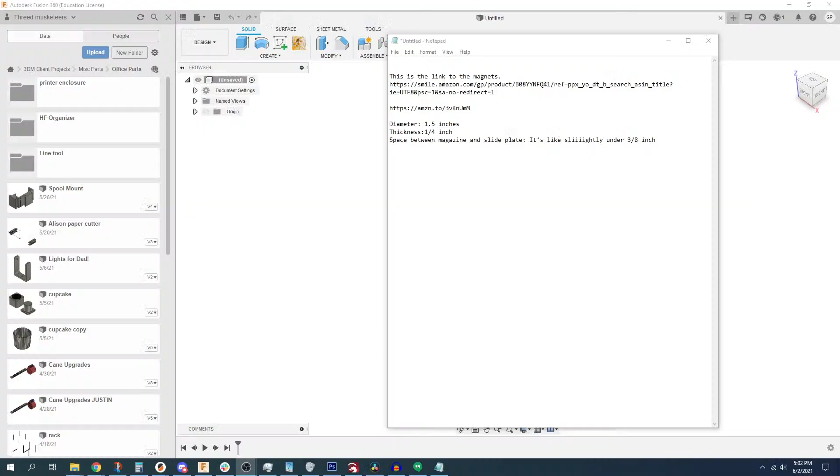Alright, we got Little Grant up now. We are taking a look at some of our design constraints. This product is - and I'm going to try to spell this out to you without showing you, because showing you is a little bit weird - for someone that does 3-gun. 3-gun is 3 different types of guns in a competition, just deal with it, it's an American thing, Allison, alright? I know you're going to ask me about it. It's an American thing, don't worry about it. But when you start the competition, all firearms must be unloaded, particularly the pistol. However, that magazine that goes into the pistol first does need to be in a holster.

And it is tradition that a lot of the shooters put them on magnetic holsters. However, the magnetic holsters have a few weird problems. One, the dude that makes them kind of sucks - very expensive, and from what I could tell, didn't know what he was doing on Etsy. So Kenzie made her own that is literally just some magnets. I'm going to post the link to the magnets in the chat that she is using so you guys can get an idea. She's got 2 of these magnets stacked vertically like this that she can then place her magazine onto, because these are all about speed.

So literally, when she is going to reload, she's letting the magazine fall out of the gun, grabbing another one and reloading it. And the next person that goes around, they pick them up, right? So she is slapping other people's magazines onto this holster. But the problem is, you get metal shavings that stick to it, and it's a real pain in the ass. I have this same problem with these flashlights.

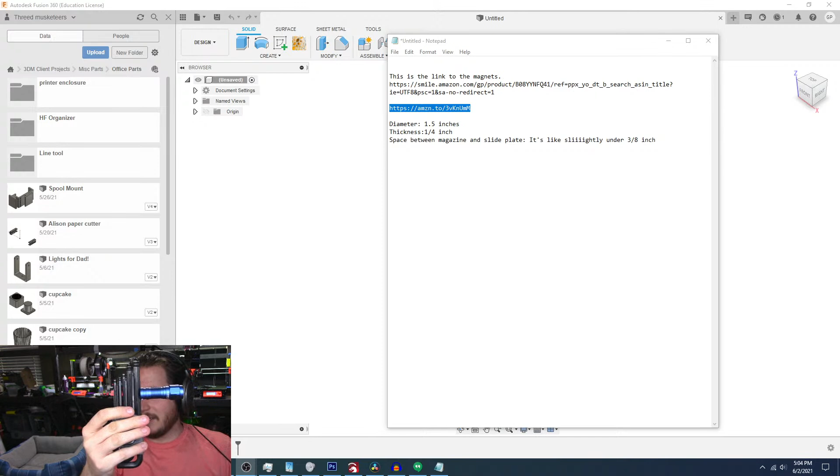Did Grant bring a piece of steel? Maybe. Is this steel? No, that's aluminum. Is this steel? Ha! Steel! See? The magnet has a - damn it. The light has a magnetic tail cap to it, which is great if you need to stick it on something and shine light down so you can have spooky... Well, that doesn't work. Here, I'll put it on the table here. So you can have really spooky talks about spooky things. God, this isn't... There. Spooky talks doing spooky things.

Anyways, we are going to design some covers. That way, if she gets any metal shavings or debris on them, you can pull the covers off. And because the magnets are powerful, but not that powerful, the parts will just fall off of them.

We're totally fine. She actually sent me some design specifications. The diameter is 1.5 inches. The thickness is 1/4 inch. And the space between the magazine and the slide plate - the slide plate is what she uses to take this thing on and off, it's all quick release, basically awesome American magic, that's the easiest way to describe this stuff - is slightly under 3/8 of an inch.

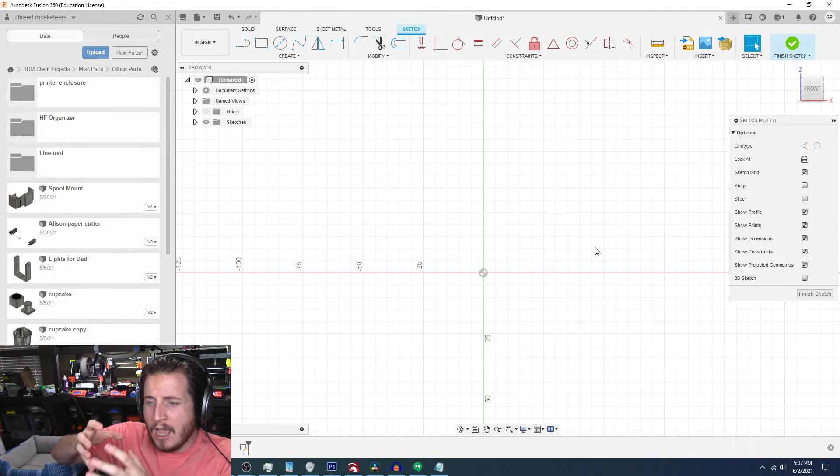Because remember, when you pull the magazine off, it's not going to take the plastic part with it, right? The plastic part is non-ferrous, so we shouldn't have a problem there. But let's go ahead and start and get our base dimension set out here. So we know it needs to be about 3/8 of an inch out.

Yes, I agree, Justin, TPU might be a good print. Then we can add our relief cuts. My only concern is that sometimes TPU doesn't go back to exactly the same place that it was, so it'd have to be a little bit thicker than normal.

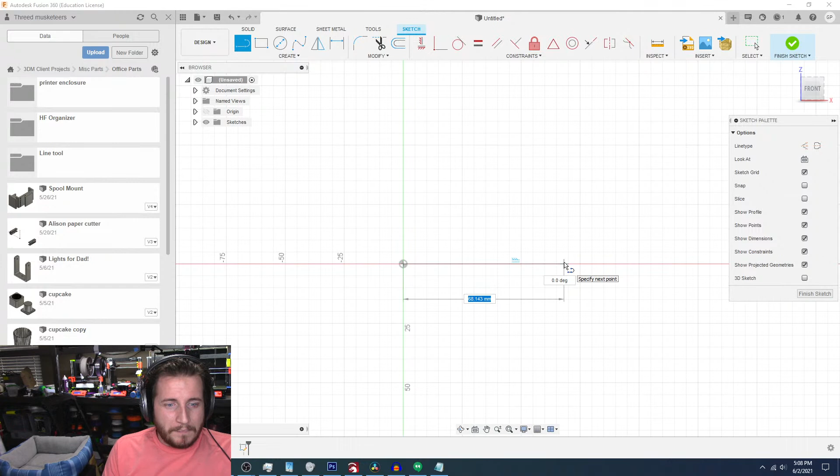And you sent me your logo, which I should pull up because I want to make sure we can put that in there. So let me bring up my email so I can grab that, give me just a second. I was hoping I was going to get an Illustrator file, but unfortunately I didn't. My whole plan was to embed your logo into it, but we're going to cheat, and potentially do it the hard way.

Kenzie, do you want the reticle, or do you want the fire-breathing dragon thing? Let me know. All right, let's hit it.

All right, so we know we need to make - no, Fusion, don't do this to me - we need to make this dimension 1/2 of 3/8 of an inch. Oh, hang tight. Oh, cool. All right, preferably DXF - if you have it in DXF, that's what I really, really want, because DXF I can put right in here and it makes my life really easy. So 3/8 of an inch should be 0.375, but I'm just going to do it the hard way.

So 3 divided by 8, times 1 inch.

We're going to do all of this divided by 2. This thing's real tiny. Don't do that, we're starting with... where's the thing? Diameter is 1.5 inches, so it's 0.75 inches. We have to get our diameter set, because the diameter is what constrains everything else.

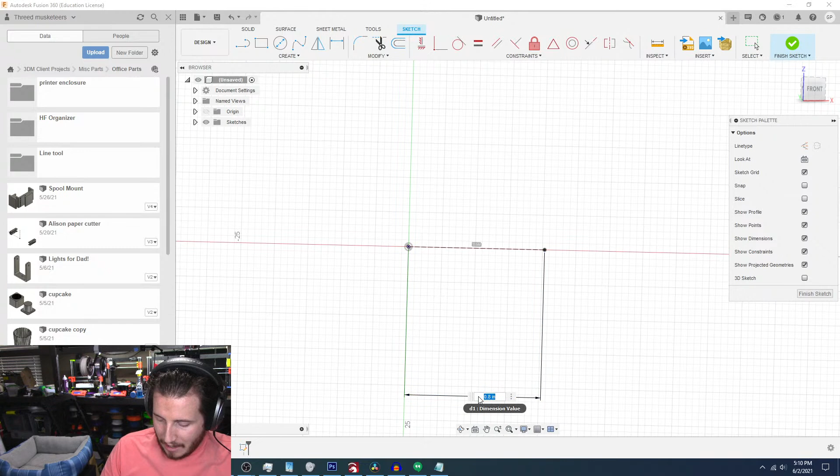So we know that we want to make this a little bit big, so we're going to do it deliberately. We're going to go here from 0.75 to 0.8. 0.8 takes us to 20, so I'm just going to go straight to 20 millimeters. That should give us really enough room for it to slide over. Because it was 19 and some change, now it's going to go up to 20, which should give us some space there.

When I get the logo, guys, I will get that over to you, but I'm waiting for Kenzie.

Anyways, let's get some of our design stuff rolling here. Alright, so we want to do... our thickness is 1/4 of an inch. We want it to look pretty for that, so we're gonna curve the outside edge. And really, we don't got to do anything all that difficult. It's gonna come up and back to the center. So we can grab the center post here, come up till we hit 90. And we can hit our dimension from here to here, 0.25 inches. That is literally the base of it.

Let me refresh my email to see if I got that stuff. Not yet. Kenzie, let me know when you send it, that way I can keep an eye out for it.

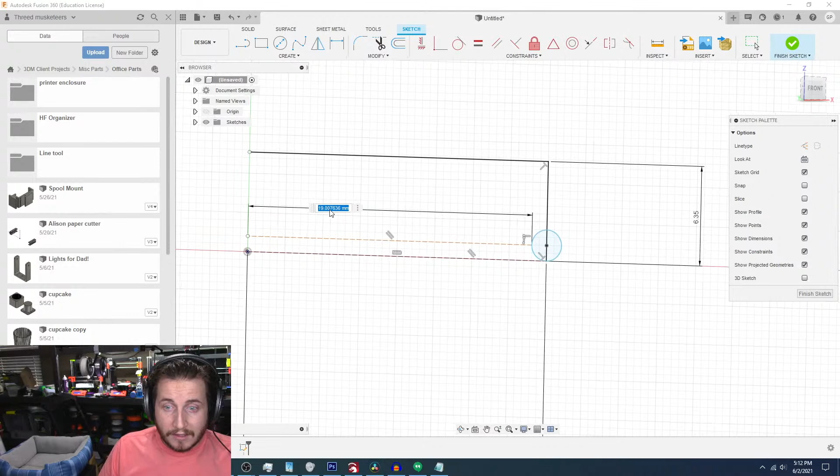We're going to go ahead and grab a circle, throw the circle here, bring it to there. Now we need to make a line coming from the end of the circle to the end here. We need to go back and hit X to make that a construction line. We need to put a dimension on this. We want this to be about 19 millimeters. Okay, and that will help us set all of this up.

Sent it as a link. Okay, let me grab my email and find it.

So what this is doing while I'm waiting for my email to reload, we are making sure that the detent we're creating is not too crazy. This will help us better identify what's going on. So I want to make sure that I create a point, match that there, and use my constraint, which is coincident, for this line to there, which it already is, and same thing for that. So now we can use our diameter tool, get a diameter, and that is more than adequate.

Just waiting for the emails to come in. Got it. Grabbing the logos now. And then I'm going to send them to my staff so that they can convert them into what I need. Give me just a second, everybody. Okay.

Kenzie, which one of these do I want? I'm seeing lots of these. I'm guessing it's the top one. Is that the style that you want, with the big bad boy? Alright, while we're waiting for that, let's keep going.

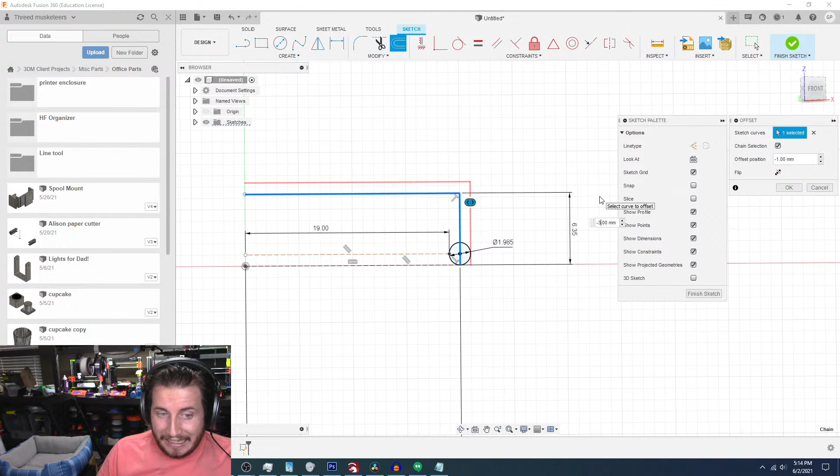We need to make sure that we have enough thickness, right? This thing needs to be thick enough that we don't have any issues. So to do that, we're going to hit O for offset. We're going to offset in the other direction, and I'm thinking because this thing is going to get the hell beaten out of it, we want to make sure that we're giving her at least 3 millimeters. This thing is going to be a bit of a chonky boy, but we need that.

Kenzie, can you measure the distance that you have between the two magnets themselves? How much distance you have there? Because I want to make sure that I don't make these too big that they don't fit.

So while we're doing that, I'm going to do a line from here to there, and we are not going to constrain either of these lines. L for line, of course. Yes, L for line, we're not going to constrain. Geez, let me do a line. X for construction. Just bring it all the way up so I can make sure that everything here is coincident.

Can make sure this is coincident with that, which it is. Okay, so the little line should be perpendicular to here, and then also perpendicular to here. Now, because we don't need to have a constraint on this, I mean we can if we want, we can just hit a dimension tool. It's going to over-constrain it. I'm guessing, why are you mad?

Well, doesn't matter, that's inconsequential for what we're doing. We could viably trim this as well. We're going to have to make this so there's a quarter inch space between them.

All right, so I'm going to give you 2.5 millimeters. Grant, redo that, it is negative 2.5. And that way you should have enough space in between them, because 6.35 millimeters is a quarter of an inch, so 2.5 will get us at 5. Gives you a little bit of wiggle room to make sure you can get these out. Quite frankly, I'm going to go down to -2 even.

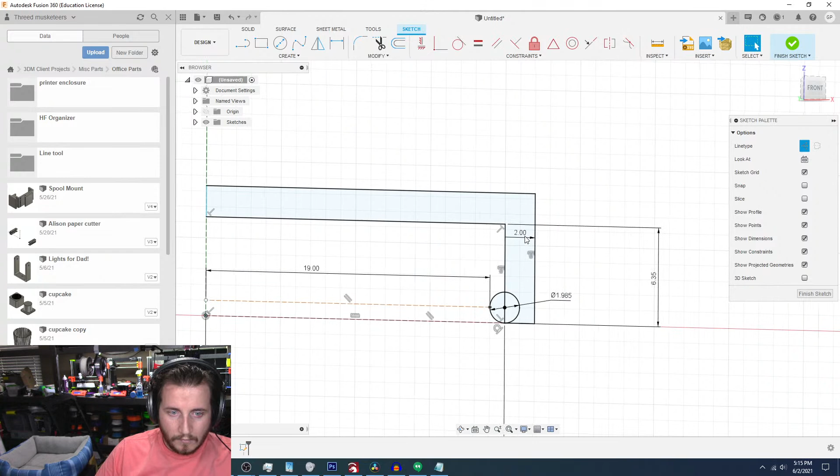Okay, and literally there's probably not much more we have to do. We're going to create a revolve. We're going to grab this, and this and this. We're going to revolve it around the center axis. That gives us our main part now, with this ball basically on the inside. We're going to create a new body out of it.

I'm going to do something that I haven't shown before yet, which is a section analysis. Section analysis lets me see inside of things, so I can actually see the thickness, because here that's where things are going to get caught, and I don't want that to happen.

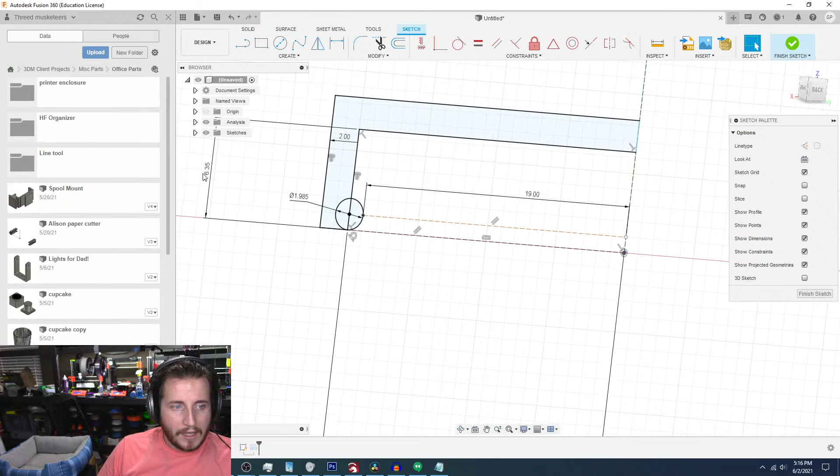And you know what, I think I have missed something. Yes, I have. So I have to make sure that the magnet actually sits in this area here. So this 6.35 actually needs to be probably 8.5 minimum. Because we want it to fit in, but if it jiggles a little bit, it's not a problem, as long as it doesn't fall off.

Hey Nadav, how you doing buddy?

We're going to come in here. We're going to make sure that we do a fillet on this edge, because we want to make sure that it doesn't get stuck. We don't want hard edges. Hard edges will mean things will get stuck. That should give us enough curve.

Let me go out to 1 millimeter. And so what I'm doing is I am looking at the curvature right here, this green line, and I want to make sure that it looks nice and smooth. Being smooth is what is important for this to function appropriately.

I tagged the wrong person in my Discord.

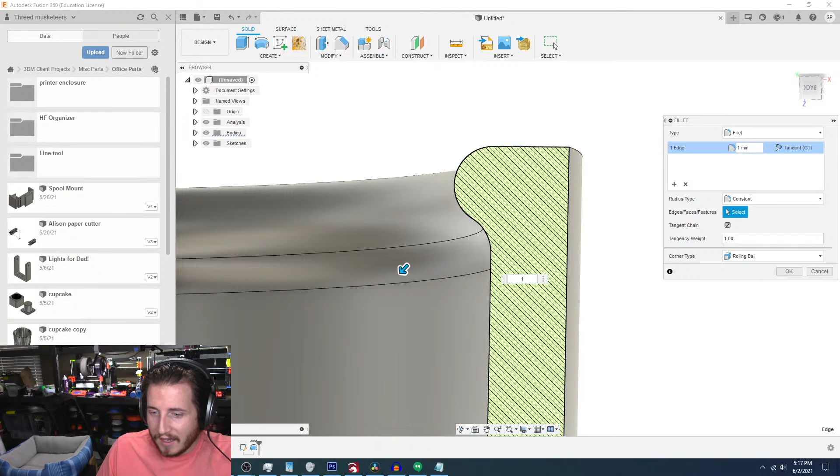Alright, so we've got the fillet set where we want it. We're going to leave this, we're going to fillet this edge just a hair, like 0.25, just a little bit. We can go up a little bit, let's go 0.35. And this top edge here, we're going to fillet quite a bit, so maybe 0.5. Oh no, give me that full millimeter. And that way it doesn't catch, it doesn't hurt the hands while you're using it.

So we've got that for our fillet, and we can see our body is in here. This is where your section analyses lie. I can turn that off and go back to seeing the entire disc. But we are still concerned about what happens on the inside here, so we're making sure that we have the right diameter, we have the right height. It's going to be a tight fit, but I think it's going to work.

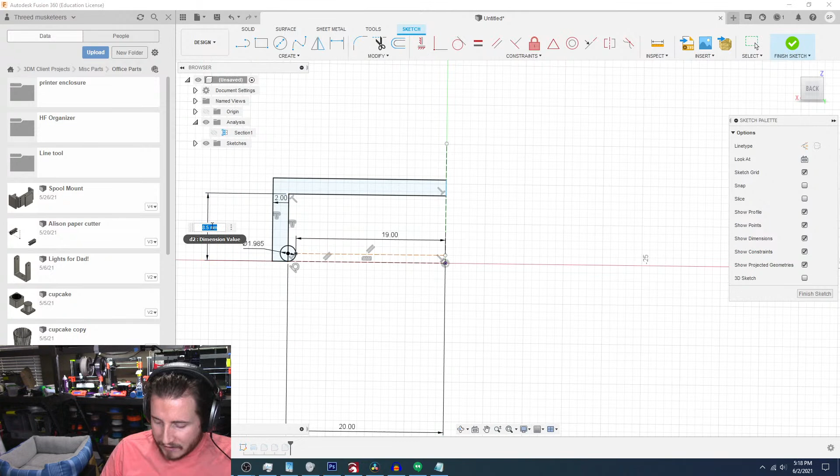Now I am a little concerned about it popping off, right? Right now, if I give it a little bit of extra room, she might be able to fit her finger under it. I'm going to take this all the way to 10, and Kenzie's going to have to help me figure this out, because if I take it all the way to 10, she can push it up some and pop it off with her hand.

Because my concern here is, I'm going to start putting lines in here, and those lines are going to enable it to flex. The problem is, we have to print this in a really poor orientation. The way to print this would be facing straight up and down like this. Well, as you guys know, 3D printing is weakest along the Z-axis, so along this vertical axis here.

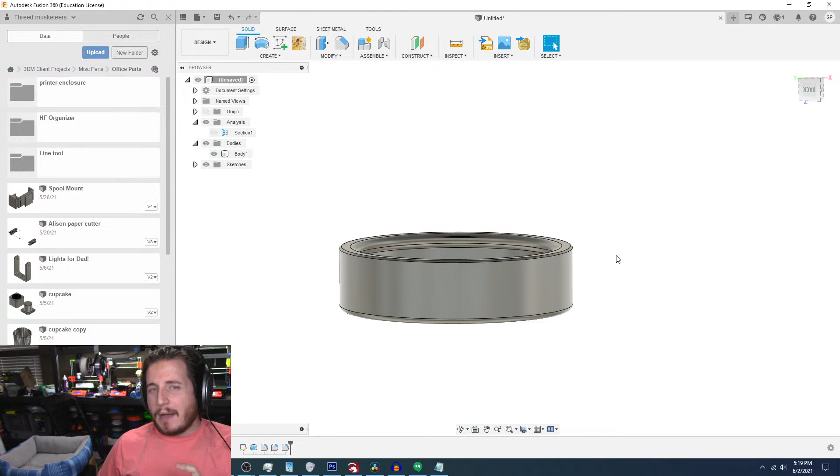She's got nails, and she can take it off the top of the top one and off the bottom of the bottom one. I have a plan. I'm gonna give you 4 cuts in here. And so what we want to do is we want to create a sketch. And actually, I can use the original sketch, because I want to create a cut. And that cut, I want it to come in.

Well, we're going to do something cool. We're going to grab a point, we're going to do a midpoint. So you just grab on the edge and roll down until you see a triangle. There's a triangle that pops up, little triangle next to my cursor right there, and that tells you you're at the midpoint.

So once we have the midpoint, we're going to grab a line. We're going to come across. Okay, we're going to go ahead and finish that sketch. We're going to turn on the sketch so I can see that line, because that is how much of a gap I'm going to do.

So we're going to revolve this and this. We're going to do it symmetric. We're going to revolve it around the center axis, but it's not going to be 360 degrees. I'm going to go, I'm figuring 10. Oh, that's way too much. Let's go 2.5.

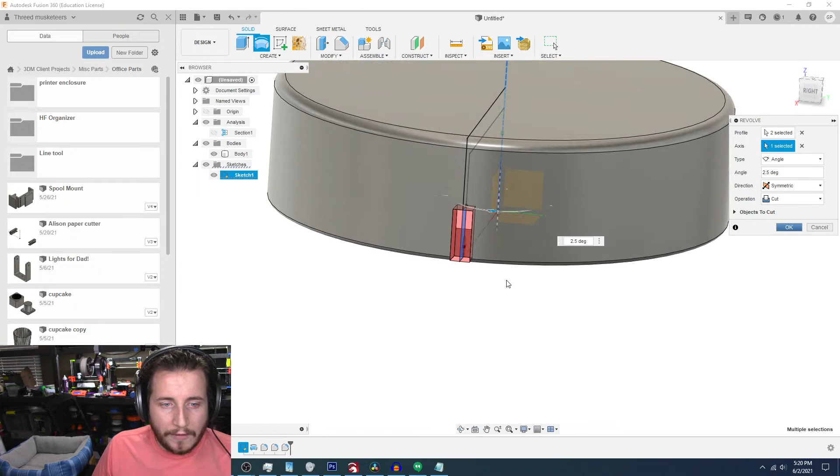Not 250, 2.5. That's going to give us a little cut. Quite frankly, we can probably go 1 degree. Nah, let's go 2, let's give her just a little bit. That's going to give her plenty of room to flex this thing, even if it's made out of hard plastic.

Oh Grant, you big dummy, you should have also grabbed that. And that now means we've got the cut. Are we doing things right? Ah right, we need to move it, and we need to move it back so that the revolve occurs before.

Now see guys, I'm going to go back and show this to you. You see how I did the revolve, but because the revolve occurs after, we still have this weird fillet that's going to pop in the way. So we're going to grab down here at our history, roll our history back, and now it's gone.

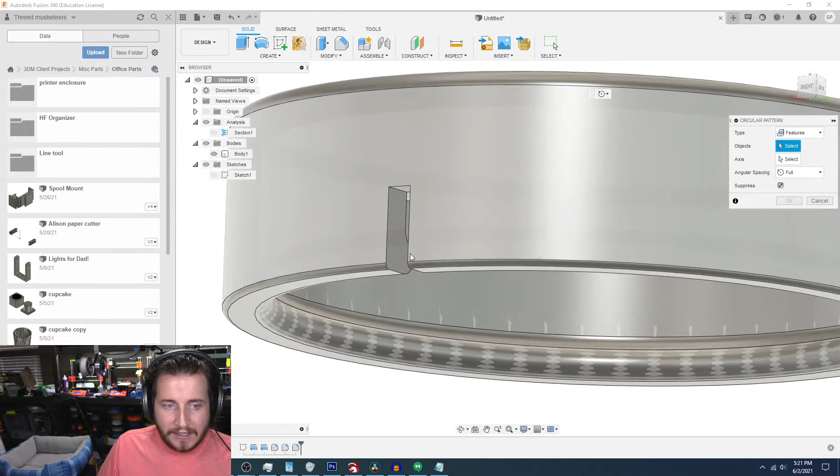And what I want to do is I want to have 4 of these. So we're going to go to Create, Pattern, Circular Pattern, and we're going to grab Features, because this is a feature. We want to do along the top axis here. I mean, 3 might work, but I'm figuring 4 might be better.

I mean, an odd number is just cooler. Kenzie, give me a number between 1 and 5. Or 2 and 7, I don't know. Give me a number.

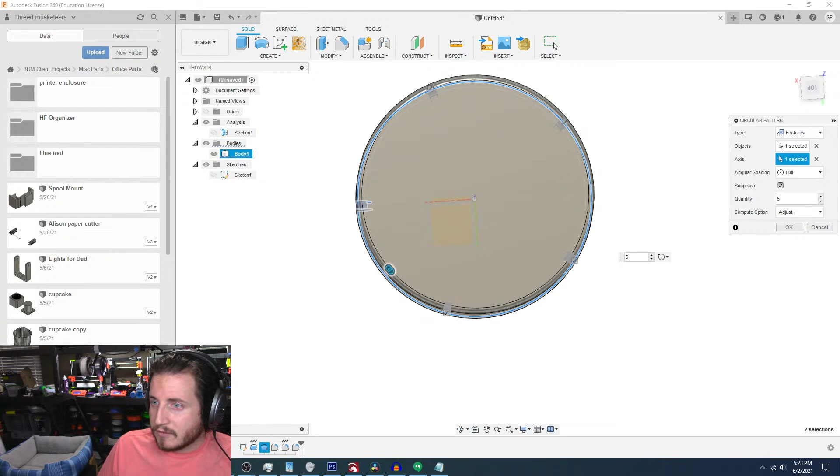Kenzie says 5, so we're doing 5. There you go, so now we've got our pieces here. And of course, again, this is done before all of that. So we got to bring this thing, I'm just going to move this out further so it's out of the way.

Alright, I now have Kenzie's logo. I'm going to try it as an SVG, so we'll see if we can get that to work. So this is her logo. I need to save this as well.

We're just waiting for stuff to upload. Now that we have something, we're going to grab the asset, and we're going to... Grant, you could have just done an insert SVG, you dingus. There you go. That's where I want it. And of course, it's freaking massive.

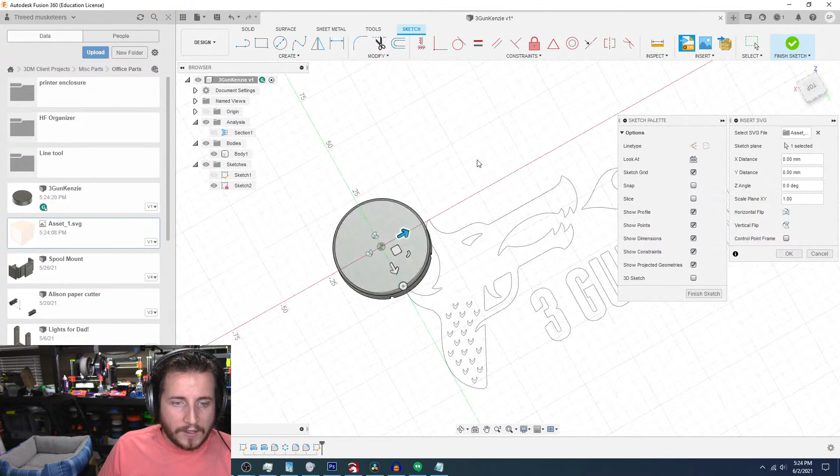Justin, I think that worked out well, buddy. I'm going to shrink this way down.

The thing with a lot of this is it's difficult to adjust the size later on, so I'm trying to make it as big as I can to get her what she wants. Okay, I think that happens to look pretty well. I might want to bump it down ever so slightly. Beautiful.

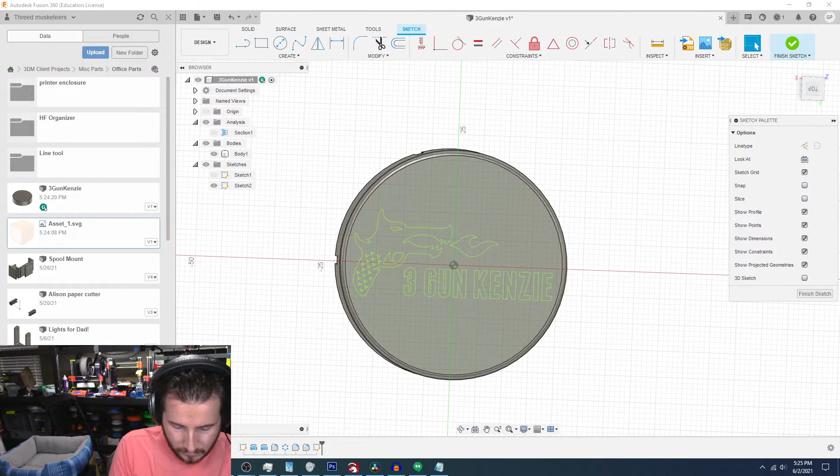Whoops, I am typing... Alright, can I grab these? I totally can. Beautiful, beautiful, beautiful. Alright.

My brother, I'm trying to make it bigger to give her what she wants. Well, story of my friggin' life, right gentlemen? I'm just saying. Alright, let's...

Hey look, we're doing this live, okay? Sometimes things happen. We're going to kick these in ever so slightly. Maybe negative 0.6. Oh! Alright, those little dragon scales are gonna suck so much. Oh, it's gonna suck to print, but let's do it. Whatever, we're here, let's do it.

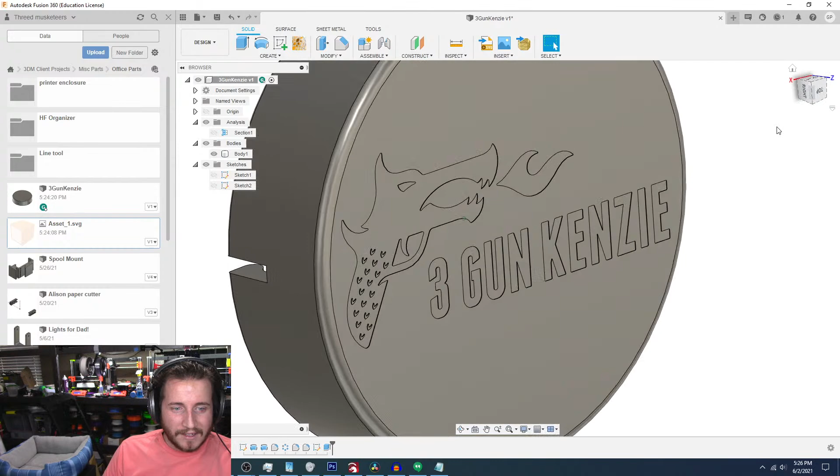There you go. So I'm looking at about 0.6. I probably want to go a little bit more than that. Oh, I did 0.06. Yeah, no, we'll do 0.6. That's going to give it some depth.

Those are really going to suck. Boy, that's really going to suck.

Hey Kenzie, what is your favorite color? I've got some really cool colors which you've seen before, my color changing ones. Let me go to Big Grant so you can see it.

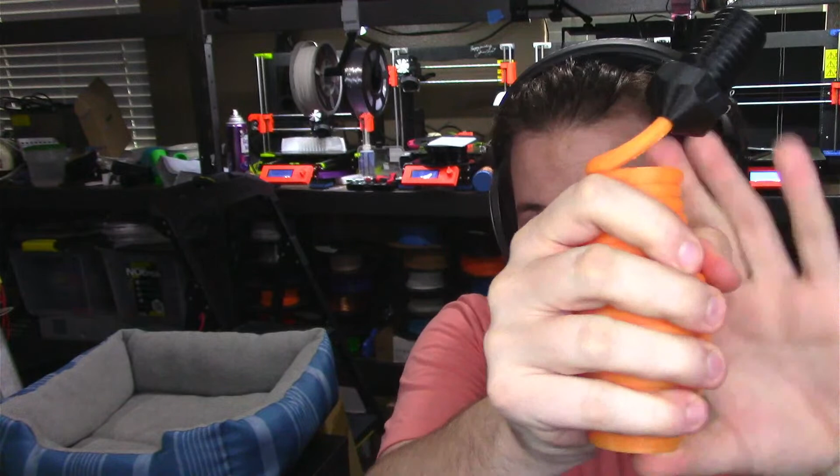Let's bring up Big Grant here. We've got the orange, and Kenzie, they're either going to work or they're going to fail, and I'm just going to let them go - I can cut them off later. So you've got the orange, but when you put heat on it, it turns bright yellow.

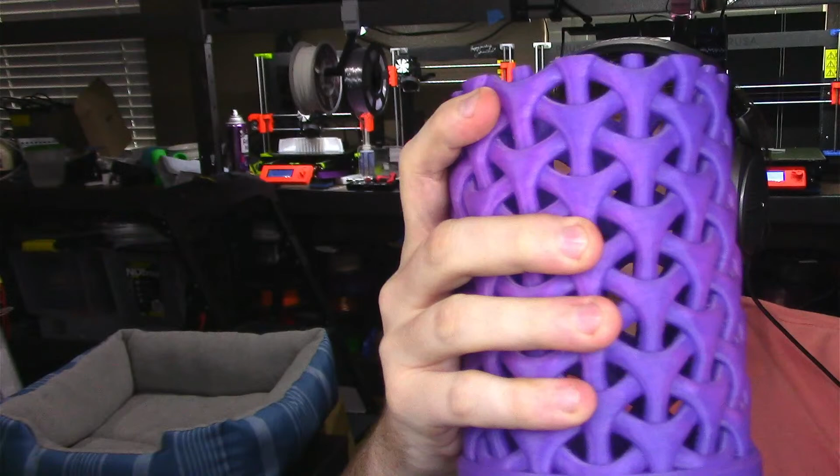And we've got the purple that when you hold on to it, goes to pink. Well, it did - I promise it goes to pink. Where's my blowtorch? Here's my blowtorch. See, anytime you want something to happen, it involves heat. See? Goes to pink. Problem solved.

I do have a really cool blue. I was actually saving it for a company project. Where is it? Where's my really cool blue? There it is. I was saving it for a company project, but you know what? It might actually be cool for this.

That's not it. Where's my other blue? Give me just a second. Let me find the color. Ah, there it is. It's on the floor, you dingus.

I've got a shiny silk blue. This is PLA, which is my only concern, that if it gets too hot, it's going to go poorly, it'll get soft. But I do have a light blue flex. I don't know, Kenzie, do you want a shiny blue, a light blue, or do you want a color changing? Let me know, I'm gonna keep working on this.

And actually, if we can make it happen, I am going to actually print this live for you guys right now.

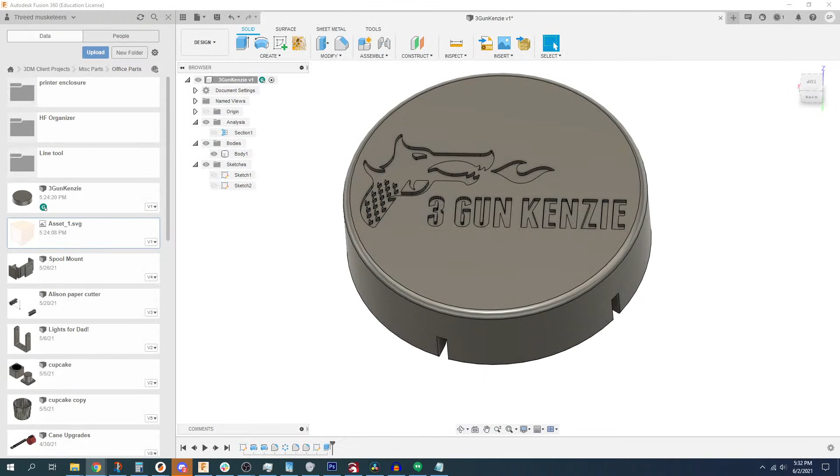Go big. No? Alright, whatever. Fine, you don't want to work for me? We're going to go back to that. We got little Grant coming back. We're here hanging out, so we've got the part.

Kenzie, is there anything else that you would want to do to this? I know what send it means. Kenzie, you know my hobbies. I know what send it means. Alright, we're going to grab this part.

We're going to make sure that we save it. I am incredibly concerned about that, but I think I have a way to get around it. So we're going to right-click on 3Gun Kenzie, save as STL. Going to save that, we're going to come in here.

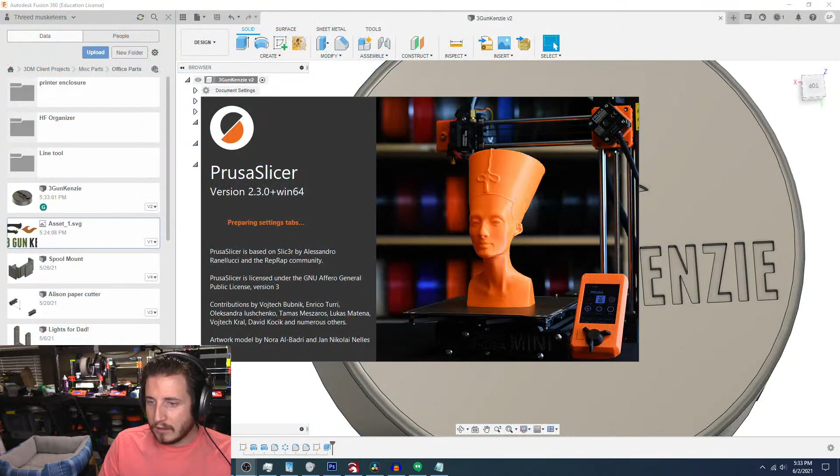We're going to grab Prusa Slicer. And while I'm doing that, I need to add a display capture. Right? No, I don't need to add it. This is for my Big Fusion 3.

We're going to go to the 3DM PETG. Actually, we're not going to do that because this is going to be one for the next time lapse. We're going to go to the High Temp Prusa, make sure that we're grabbing one of our favorite Pretty PETG V3 profiles, and make sure that we're on the MK3 speed. We're going to go grab Kenzie's file, which is in here, God knows, somewhere.

If any of you judge me, I'm out.

Let the file load. Oh, Windows Explorer just crashed. That's cool, gotta love having overclocked computers, right? Sometimes they just don't work. Oh yeah, there's no way, not a snowball's chance that comes out.

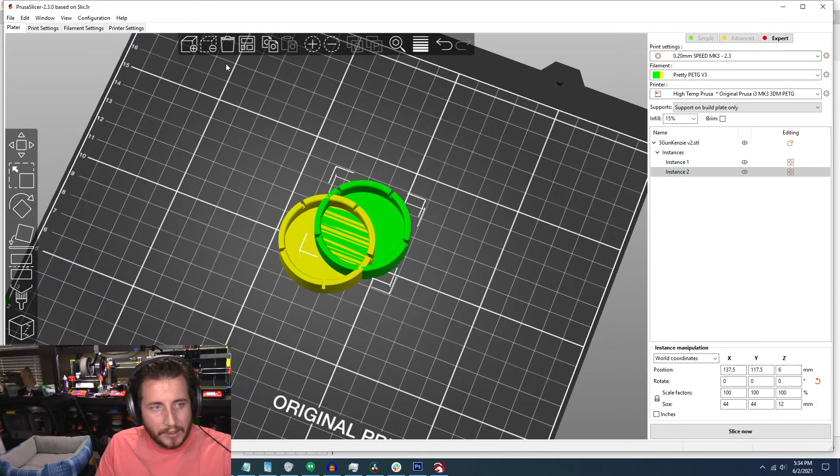Not a snowball's chance those little pieces come out. That's the little part right there. We're going to hit the plus symbol. Now, I'm going to preface this with that this is only because we are doing a particular print this way. These settings you should not use.

Alright, we're using, we love gyroid. We're doing 10%, go away from adaptive cubic. We go to gyroid infill, which is still the most fun one to say. But inside of output options, we need to make sure that we turn on verbose G-code. That's what we need to have here.

Apparently Discord's what? I can do browser capture. Yes. Right, okay, yes, Justin's making sense.

We're going to do no support, we're going to bridge all this stuff. So let's take a look and see what we get here. And so I'm printing it really the only way that it can be printed. There's not many other ways that we could print this. And oh, it's going to try.

I mean, I'm going to let it try. I'm guessing this is going to be straight solid, which it totally is. Am I going to get... I'm not going to get any in here.

So let's go to our layers and perimeters. We're going to go down to 2. Under the advanced tab, I'm going to mess with my first layer, I'm going to put that to 0.40. That should give us a little bit finer control over the way that things look.

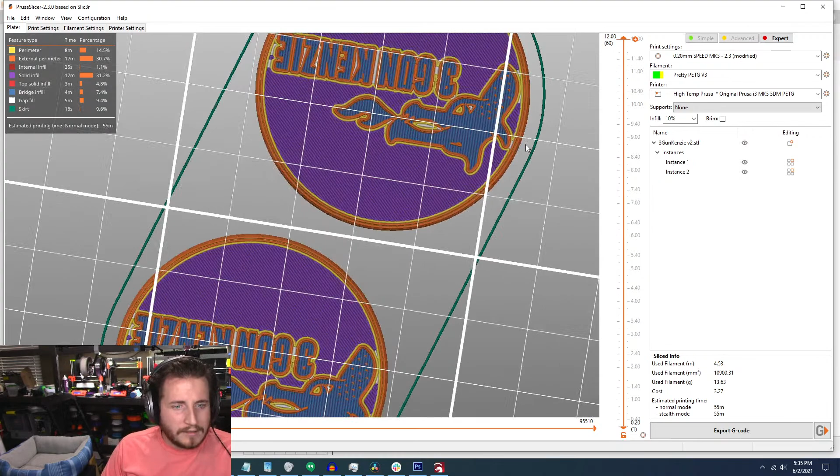Alright, and if you see, it should come out looking alright. You can see the layer above it's going to be a little bit odd, but I think it's going to come out okay.

I should go to 0.42. You really don't... okay, so here's the deal. The nozzle's 0.4, and you want to make sure you're at least 0.4. 0.4 would be that you're extruding a circle, 0.42 means it's a little bit wider. And everyone likes it when it's a little bit wider. Damn it, we're not going to get away from these jokes, we're just going to embrace them here.

Alright, are we going to get any infill on this? Not at all, not at all. I can reduce some of the top and bottom layers, because we don't need that many.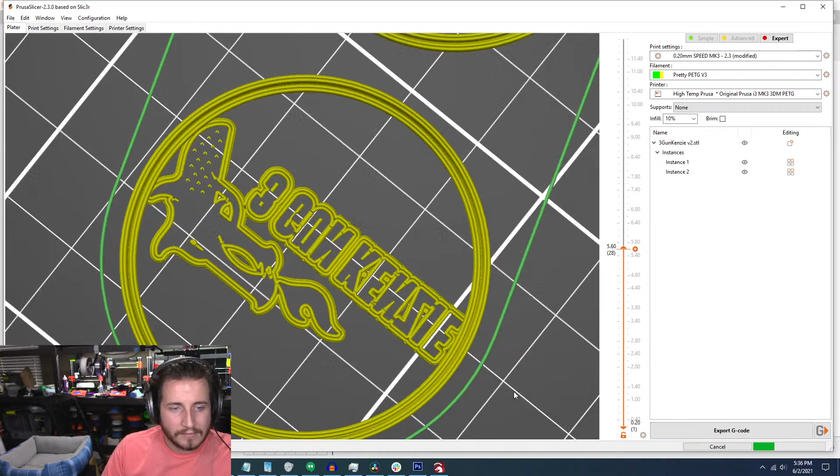Okay. We're looking at 55 minutes for 2, but let's say we turn it into just 1. 1 is 27, and by golly, it's 5:30, which means we've got the time. Let's send it.

Alright, so first, let's, give me a few minutes to work on the... I gotta add a display capture. I want to add... I guess I can add another few... we'll just call it display capture. Oh no, that's going to be an actual display. I want to capture a Chrome window.

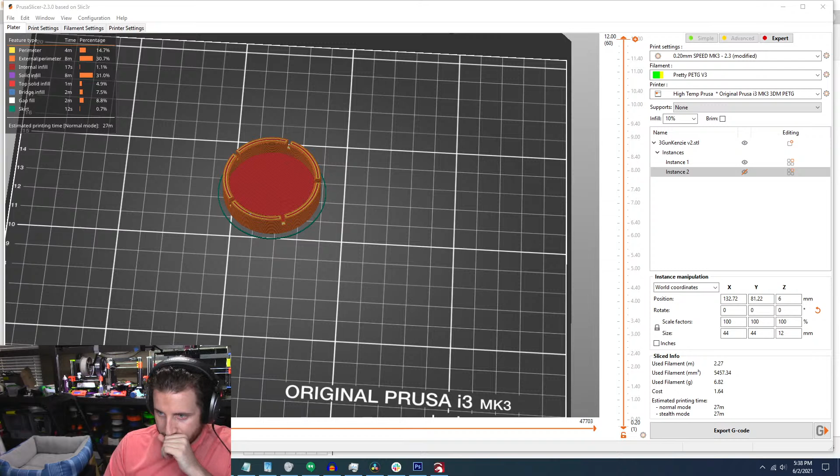So, I probably want to do a browser... I think. Oh yeah, I could do a window capture. I'm just gonna cancel this because every time I do this, it does stuff. So I'm gonna go into BRB and I'll be right back. Alright, let's see what we're gonna do here.

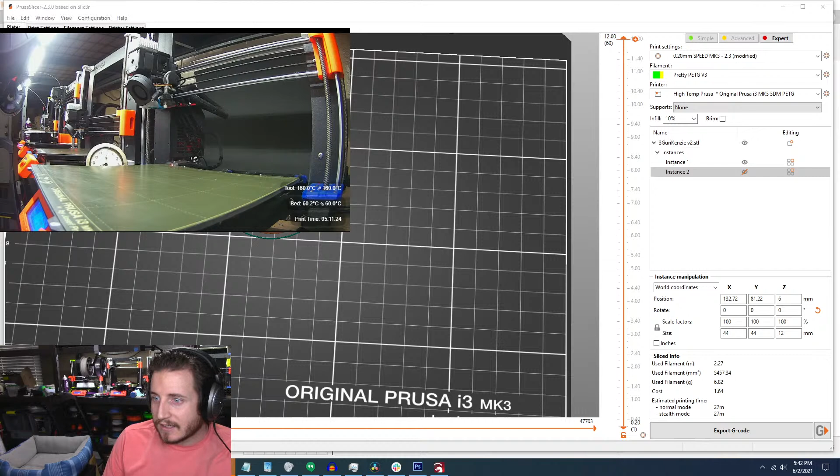And I had myself muted. Don't you just love how you do things live and you forget? Anyways, we figured it out because I'm a big dummy. Yeah, I know, Allison, I'm sorry. It's fixed now. Sometimes. Gosh, thanks guys, I'm not an expert at this. Someone give me a break over here.

So now you guys should be able to see this, this is actually what the printer sees. And this is where we're actually going to print Kenzie's part live, as we're working on other parts.

So we're going to get this rolling so you guys can watch it. We're going to come back over to Prusa Slicer here, and we're going to hit this button. This button will send it to the printer. This is only if you use Octoprint. Don't do this if you're not using Octoprint, because it's going to mess stuff up. Alright, now we just wait for the printer to come to temp, and everything will be happy.

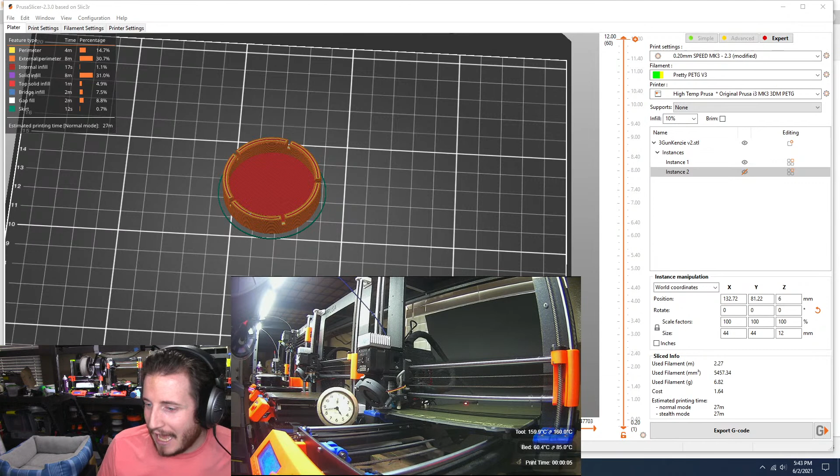I will let you guys know when I hear it starting. But we are going to go back to Fusion, and we're going to work on my part. So for that...

No, we want to move this. We'll move it there, I don't know, good enough, good enough, we'll move it there. So we got 3-gun Kenzie, we're going to give it a shot.

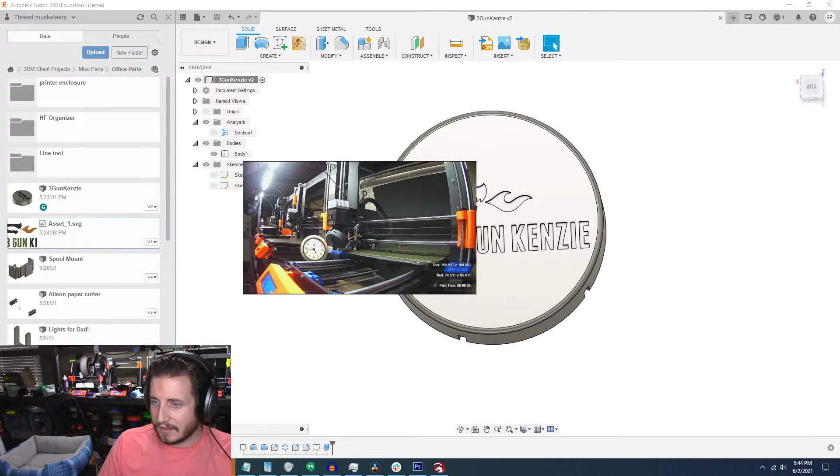And I'm told to put it in the top right. This... I'm just listening to my staff at this point. Grant doesn't know what he's doing 95% of the time. He wants... oh god, don't do that. This. He wanted this in the top right. Sure, works for me.

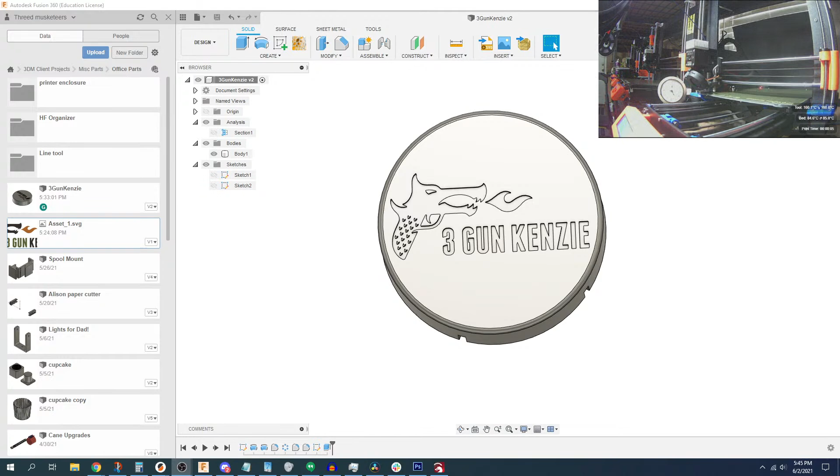Because I need to turn on... I need to turn on the printer support light. And the printer support light is what allows us to get better time lapses. If you guys just saw a light turned on. Not only can I control the lights above the machine, which are those, I can also control an auxiliary light, which is made for getting better pictures.

Kenzie says right, so we're leaving it in the right. Alright, we're going to bring Grant back up. Little Grant, not big Grant. Little Grant. Little Grant. Hi, Little Grant.

How you doing today? Yes, your back hurts and you spent 4 hours getting zapped. It was fun and you hated it. Yeah, I had an EMG nerve test yesterday, and for anyone that needs one of those, good Lord have mercy, good luck and Godspeed. Unless you like being shocked, because if you do, you're going to love it. It was not fun. They first zap you with a gun on all your nerves to make sure your nerves work. Then they poked you with needles and try to find the nerves with needles. And let me tell you, you know when they find them. And then they actually listen to the nerves firing. That part was cool. But the rest of it was terrible. Cannot recommend. 0 out of 10, 1 out of 10 with rice.

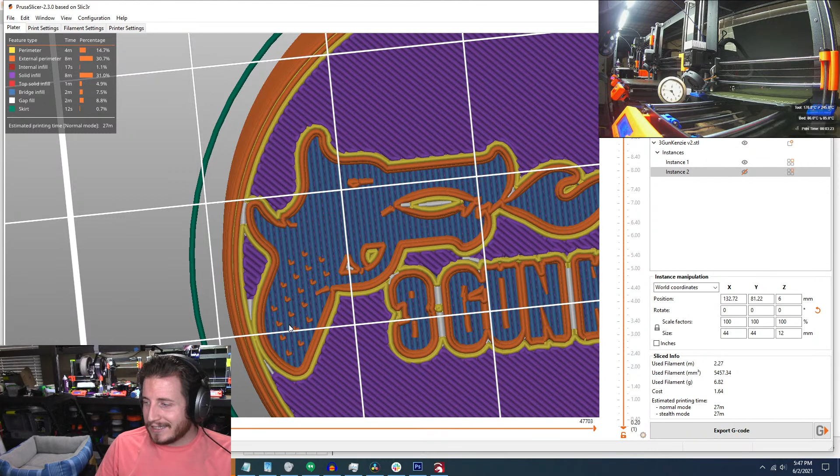We're going to go ahead and do a new design because we're done with this. We got this thing in Prusa Slicer. Where's Prusa Slicer? There it is. We got this thing in Prusa Slicer. It's reasonably happy, that's the only little thing I'm concerned about. It's probably not going to print, and it's not going to get in the way. So I'm not going to worry about it.

Also, for those that are wondering, we got up here, these are what everything is. So we have bridge right here. Bridge is where the machine goes a lot slower. Here, I will go down to more bridge. So that's bridge. And one line of gyroid infill. Gyroid infill is just so fun.

Anyways, let's do a part for Grant. So we're going to do a new design. I'm trying to find the Olights that I bought, but I can't find them.

Because if I can find the right lights that I did buy, that should be useful for us. Sorry guys, I'm trying to find some stuff, and I didn't think this was going to happen so quickly.

Oh, it's a Thrunite. It wasn't an Olight. No wonder I couldn't find it in my email. Yep, there it is, it's a Thrunite. All right.

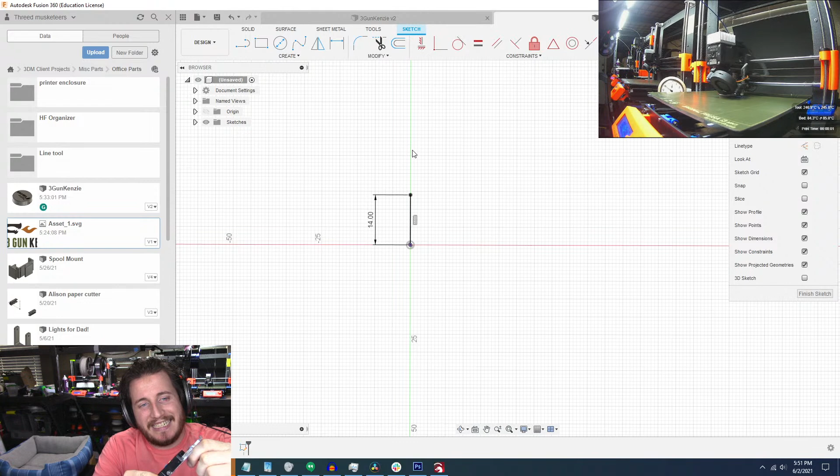Ow. The other problem with lights with magnets on, they stick to your dang calipers, so getting a dimension is a pain in the ass. It is 20 millimeters in diameter, so we're going to come off of here, go out to 20. There we go.

And apparently it is printing. Yes, it is printing, look at that. Hey, look at that. Look at it go. Is it working, though? That's really the question. Who knows, we're going to find out. But there you go, live printing on a live stream. And it even also shows you the temperatures.

This is weird, my mouse won't show up on any of it, because, man, I don't know. It's cool though, isn't it? Isn't that cool to see it happen live?

And it's actually going to be time-lapsing it, so we'll be able to see it. I'm going to wait to see when it moves over. Give me just a second, because it's going to move over and take a photo. At least I hope it does.

You gonna do it? You gonna do it? Please? Please? No? Alright, well, you'll see when it moves over.

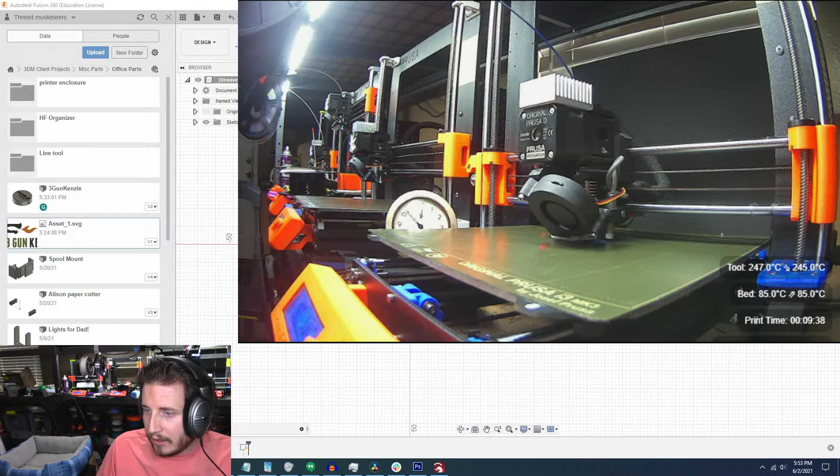When it moves over to the right side of the printer, the side of the clock, that's when it's actually taking a photo, and you might be able to hear it in my audio when it does that. So I want to make that go back and nice and small again. That's probably fine. Alright, so we've got...

It's a 20mm diameter tail cap, and we want to get pretty darn close to that. There's also a lanyard, there it is. It just took a photo. I heard that on my side. So it's got a hole for a lanyard, and that's where I would also put the pocket clip. So we're actually going to leave a bit of a section open on this, and that's how it's going to get onto the unit.

So, let's do this thing. Alright, we need to go at least 14. We need to go 20 out, which actually means we need to go 10 out, because it needs to rotate to 20. Because we want to give it a little bit of room, we're going to go to 11. We're going to bring a line down here, and do an LX to give us a construction line to go out this way, and another one come up this way.

This music is ridiculous. Can someone give me something good? That's what I'm talking about. Alright. Alright.

Back to this, we get our construction line set. Once we have our construction line set, we need to make some walls, so we're going to make some walls here. That was actually still a construction line, and if you accidentally make a construction line, all you got to do is hit X. No, Grant, you dingus, you hit X, not L. This line here is superfluous, and I can get rid of it.

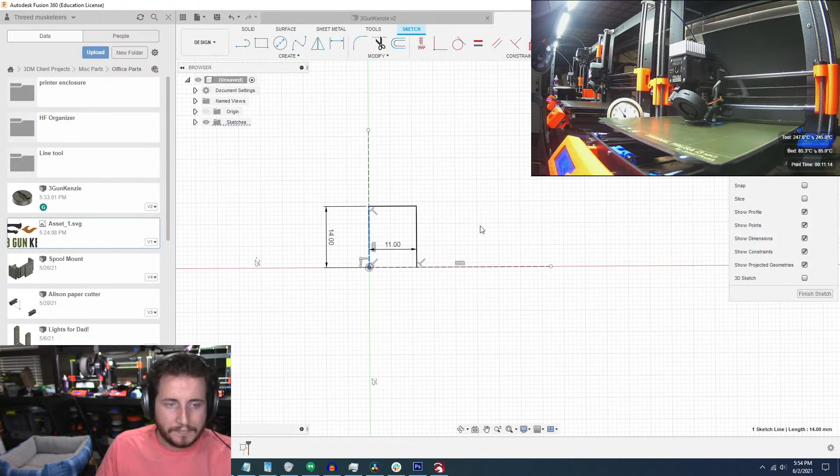And I want 14, so we probably actually want to go to 15. Right? Yeah, so we are going to do an offset again. Same deal here, get rid of that. I think 1.5 is more than enough for this. These don't see a lot of load, so I'm not too worried. Going to close it, close it. Now, we've got this fillet here. I can't easily measure it, but I can assume that it's flat, or I can assume that it is smooth.

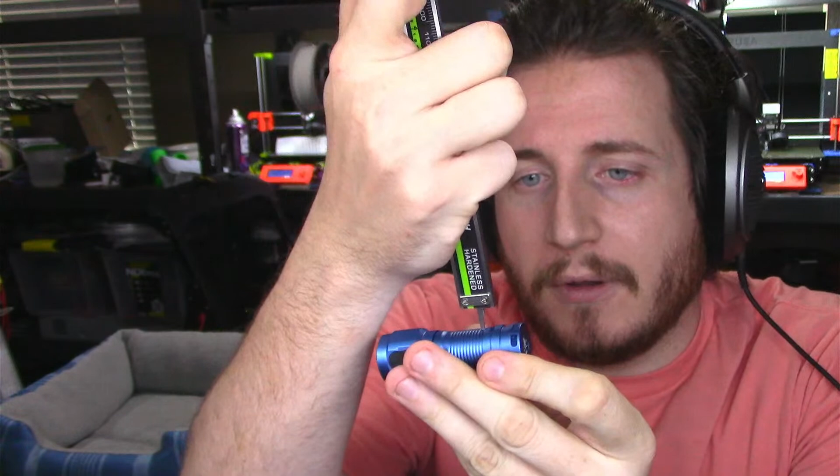If I can assume that the fillet is smooth, I'm going to go to Big Grant real quick. If I can assume that this fillet is smooth, I can actually figure out how big it is. So we can come here, use the back end of our caliper. Point seven millimeters, so that's what I'm guessing it is.

Dad's RC Workbench says drool, a Prusa running. So if I had two Prusas running in the background, is that a double drool? Is that good for at least a like on the video? Can I get some extra likes, please?

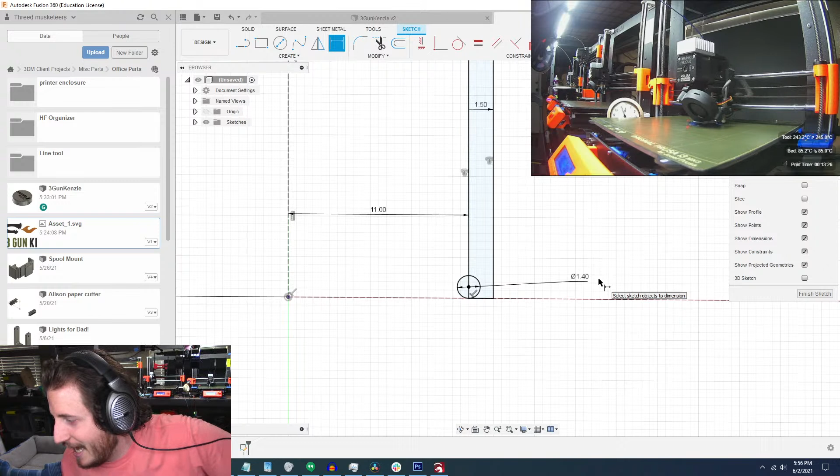You don't need to do another account, just tell me a better name to call you by. I'm hearing noises and I don't know what printer it's from, so I'm like a little head on a swivel over here. I'm just gonna call you Southern Scrapbooking. I don't know. Anyways, guys, let's jump back into this.

So that's our piece. We have a flat tail cap. That should be all that we need here.

Oh, that's right. Hey, Kelly. You know, Dad's RC Workbench, I don't know how to do ats on that either.

So we're going to do another revolve here. Again, guys, I said they were going to be two very similar things, but I said, oh, what the hell, we're here, let's just friggin' do it. We gotta do 360. And if I did that right, it should match. If I didn't do it right, I'll just reprint it and pretend like I did it right the first time.

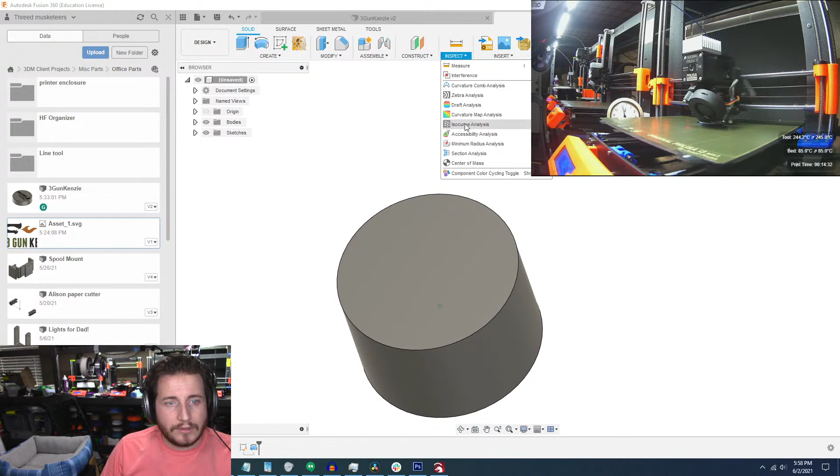Alrighty, let's... we want to do another, what is it called, section analysis, same deal right in the middle. Now, because we have a fillet, that should meet the fillet. That's what I'm hoping for. I'm hoping that it meets the fillet. Now, technically, I could cut this off at half, but this will at least allow it to bend out and flex, so I'm going to grab the light again.

We've got this lanyard section, and I want to measure the width of it. It is 13 millimeters wide. So, now I have to come back, need to do another revolve. We're going to grab that same profile, exactly what we did with Kenzie's part. Okay.

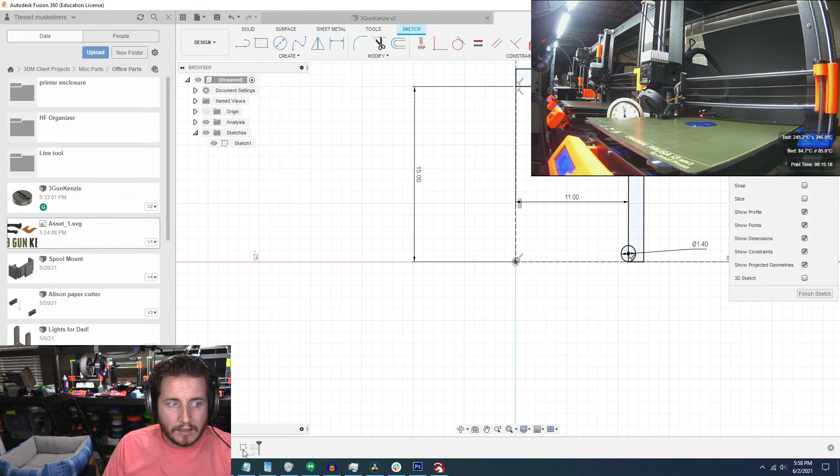Oh, Grant, but you didn't come back in here. So, actually, I'm going to have it go basically... yeah, it needs to go basically all the way up. I'm going to put it just a arbitrary number down. Because, if we look, there is just a hair worth of space, so I'm going to figure out what that space is using my caliper. It is literally 1 millimeter, so we'll come down 1 millimeter. And to do that, we're going to hit the dimension tool to this up here. We want this to be, I don't know, 0.75 millimeters.

That was a noise. I think it's the Prusa printing a white part, because that part is 0.8 of a millimeter thick. That's the kind of stuff that happens when you print really thin parts, they make noises that make you think someone is trying to break into your house. TLDR.

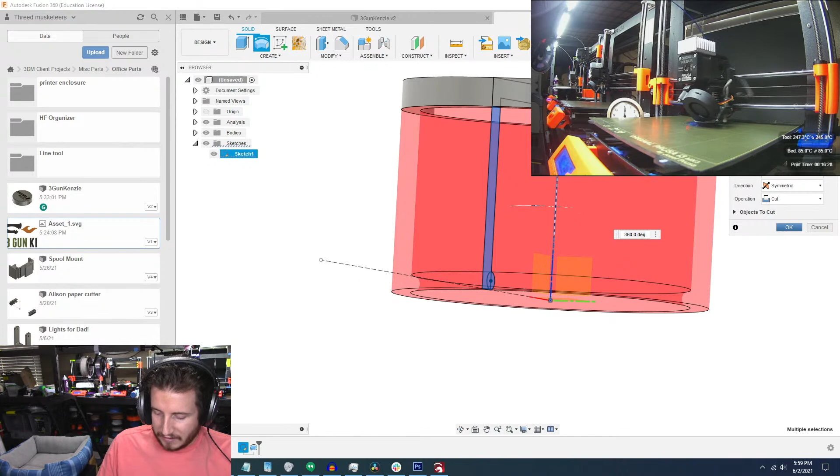Alright, so I'm going to go symmetric. I'm going to do it as a cut, axis is going to be this. It's not going to be 360, I think if we do 15... wait, I said symmetric, guys. Two sides. There we go. That's the weird thing about Fusion, man, I told it to do something and it didn't do it.

I'm going to move this just a hair smaller so you guys can see what I'm doing. Actually, I think John was right, this corner is going to be a little bit easier. You'll miss out on the bodies, but they aren't all that big of a deal, and I can keep it a little bit bigger for you.

Sounds good to me. Call me anything but late to supper. I feel that in my soul.

We probably need to go to... and we can cheat, but I'm just going to go to 20. All I gotta do is grab this line here and this line here and hold the shift key. That's only 7 millimeters.

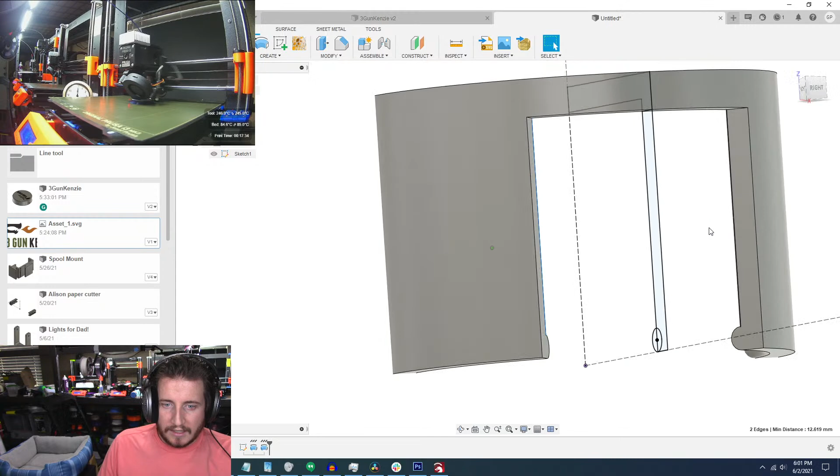So I probably need to go like 35, because again I want it so that the lanyard doesn't get caught in anything. That's 12. Jeez. Alright, I'm just going to do the full 45.

Nope, 45. Then when we get rid of the analysis, we've got the rest of our tail cap. Fillets for friggin' days. That's right, Dad's RC Workbench, that's what we love to do, is fillets for days.

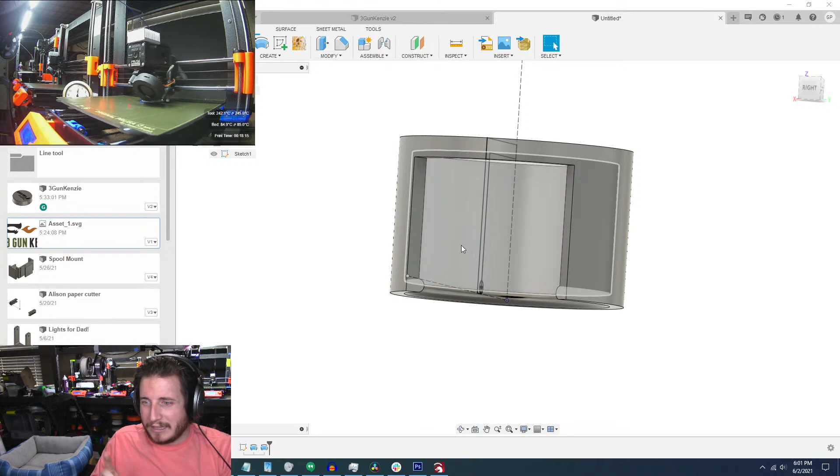Now this should give us enough room for not only the tail cap, but also for the lanyard, but also for the pocket clip. Now, I do know the pocket clip has a flare on it, I will have to deal with that another day because I don't have the size for it. But yeah, that one's done too.

Done and friggin' done, man. Right on time for an hour, too. Let's see where we're at with this.

Isn't that just cool? Here, I'm going to turn off my camera and walk over there, or stumble over there really, and give you guys a little bit of a better sneak peek as to what's going on. I'm going to pick you up, I'm going to move you in so you can see. Isn't that just cool?

So we use this to just kind of monitor our printers and make sure we're able to see them as they're running. This is literally a live feed, you can see the live time, you can see my hand in the frame. And then you can see it go and take a photo. That was the machine parking, it taking a photo, and because this is in the background too, that gets us the background with the clock. So this is what's called Octolapse that makes all this possible. Pretty freaking cool, right?

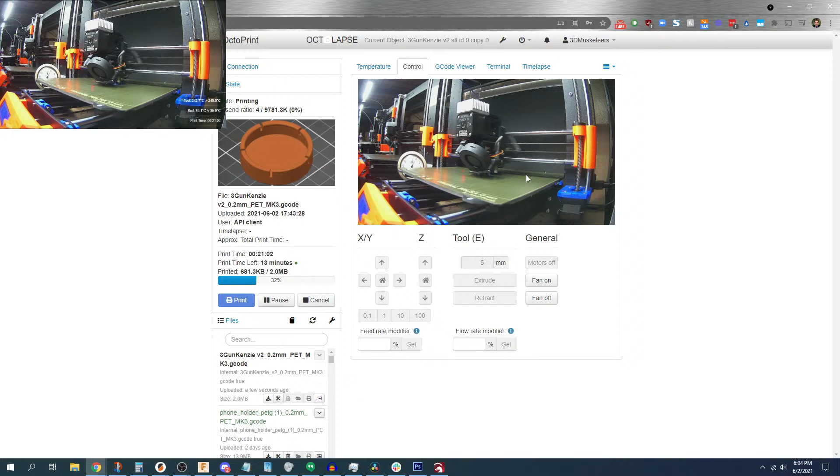Hello? It's not letting me change. I'm betting it's because I'm streaming. I guess that makes sense. Okay, whatever. I thought I'd be able to change it, but I guess I can't.

Oh well, but yeah, it shows us all the parameters about the machines. And yes, I talk to all the machines, however my varying level of love for them changes as they hate me. That was like a perfect bring in Big Grant, I was waiting for that. Sorry.

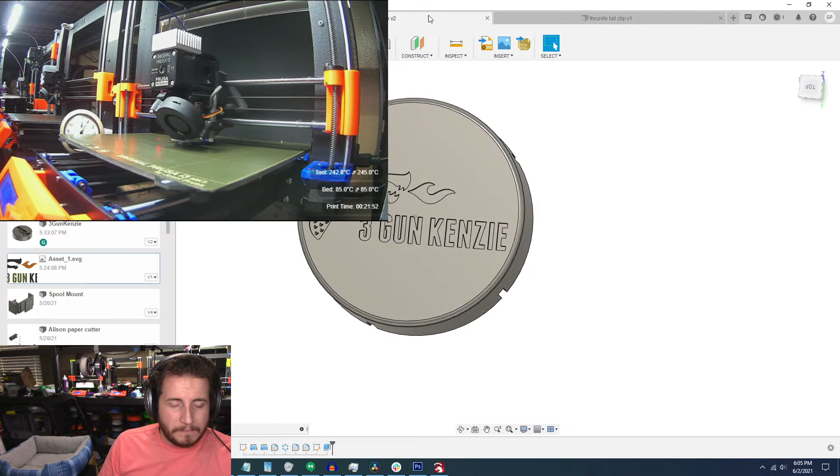But yeah, here you guys go, 3D printer live in action. It's going to be taking a lot of photos right now because it's a really tall print. Yeah, this is my part. We did the one for Kenzie earlier. Because it's so small, her logo may not come out, which is unfortunate.

So you know what? I want to do a different... I'm going to do it, I'm going to change things, I'm going to do things differently.

I'm going to re-add an SVG, because I'm thinking I want it to just be the dragon and not the rest of it.

Because that's how big... oh, I gotta make your thing smaller. Jeez, I'm gonna make this a lot smaller so we can work with it.

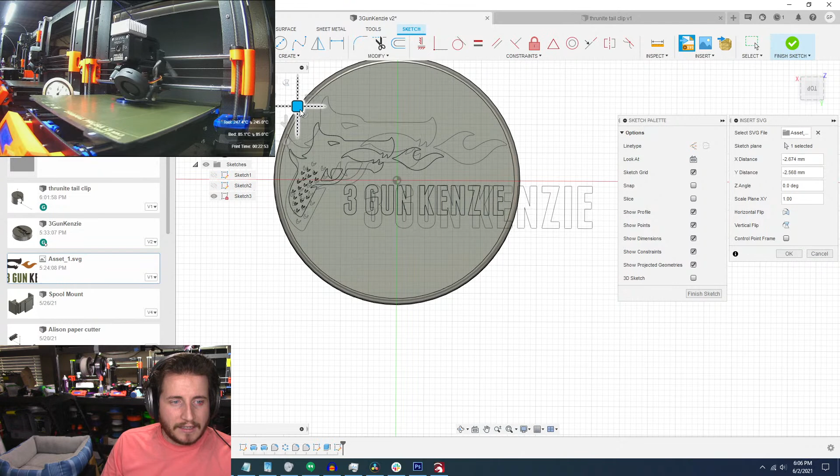But I figure if she had to choose, if we could give her just this big dragon breathing fire, she might say that is cool. She was gonna suggest that. Yeah.

Oh, you know what? I know what I can do. I'm gonna do that. It's gonna hate me for just a second. Alright, I gotta turn the body off or it's really gonna mess with me. Alright, can I... nope, that's the wrong way.

Let's see, I'm just trying to mess with the history to get this to what I want to do. So I'm going to mess with your logo just a bit. I want to put Kenzie under it. Or not, I guess it really doesn't matter all that much.

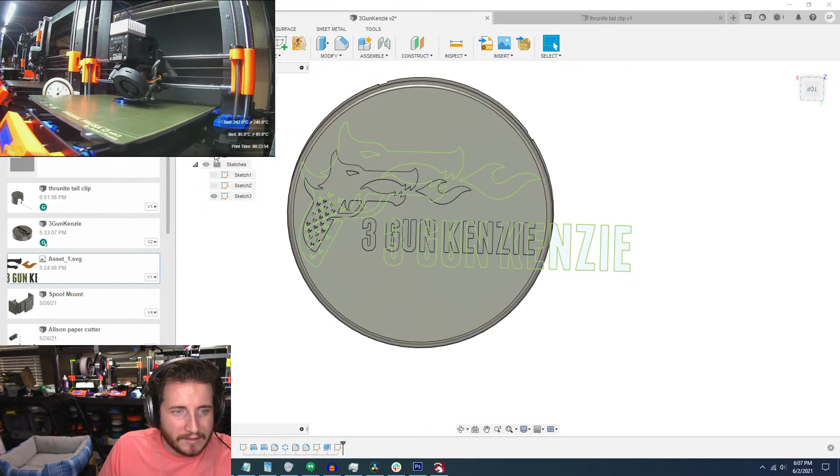Oh, you know, I totally forgot. I forgot and I should have done something. I neglected the fillet that we had. I neglected the fillet. You did the one thing you should never do, you should never neglect a fillet. So yeah, we'll put the big dragon head in there, as big as we can freaking make it.

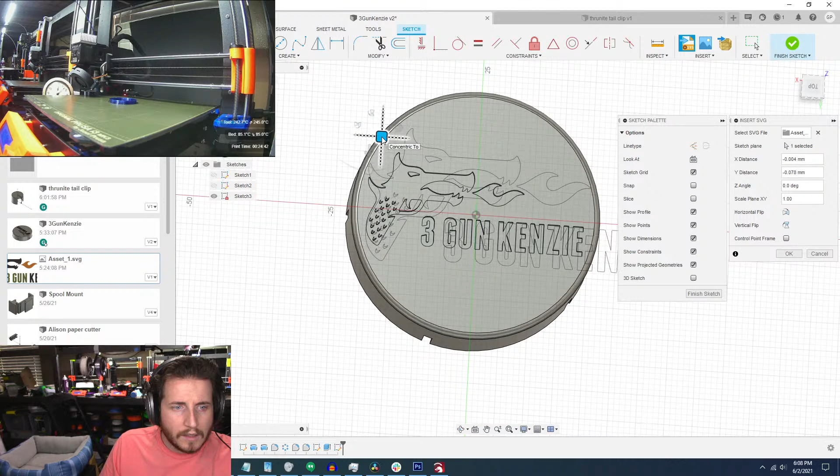Alright, let's see. Oh, oh, okay, I see. I wasn't exactly paying attention to it earlier, but now I am. So it's styled like a 1911, that's what's going on. Okay, alright, I got this.

Alright, so we're gonna suppress. I'm gonna finish the sketch.

You neglect your houseplants, you don't neglect the fillet. I mean, you shouldn't neglect your fillet. You shouldn't neglect your houseplants either.

Now it's easy for us to iterate because all I have to do is right-click on this and hit suppress. Suppress means it goes bye-bye. So now I can come here and I can do another extrude. I can grab this, and I can do negative 0.6. There you go.

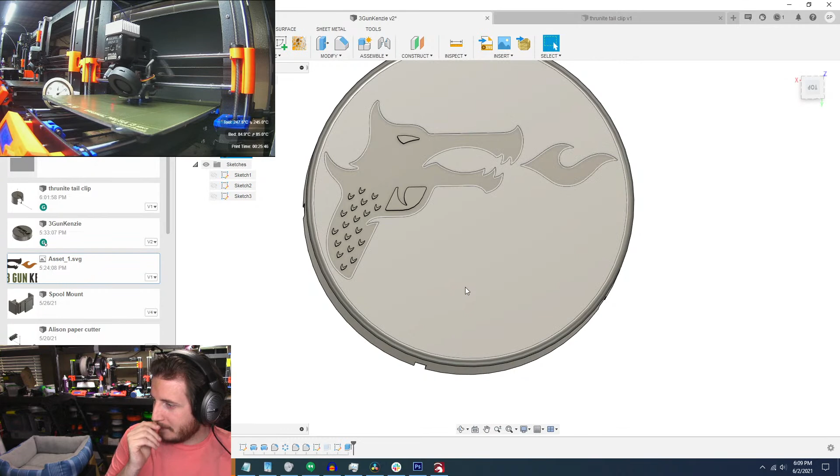I really wanted to put 3-Gun Kenzie down there. Oh, it's a 2011, okay, I didn't know.

So let's actually, we're going to save this. Save as. Actually, no, I want to create a component from the body. No, I don't. Before we do that...

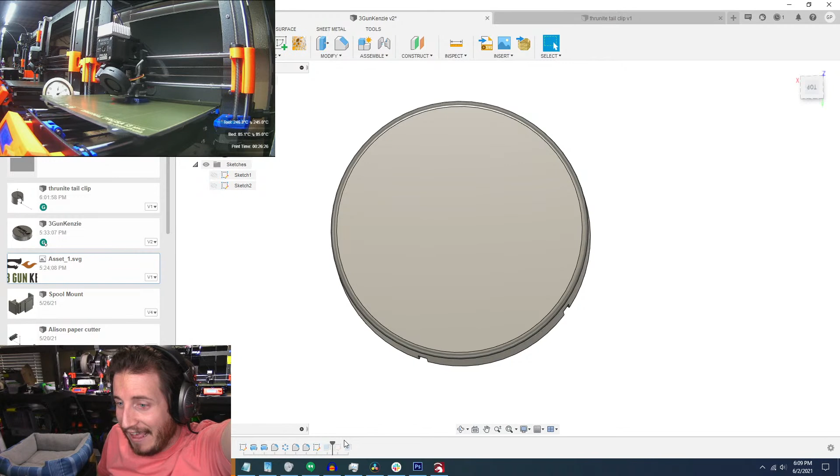Alright, one of my prints is done! Print up there is done. That thing's been giving me grief all day. I didn't think that it was going to finish with the filament that it had.

Let's see, I want to copy the body. And I'm going to leave it right there. I'm going to unsuppress that. I'm going to do that. Then this extrude, I'm going to have it touch body 2 instead of body 1.

Oh, that extrude got things mad. I can add my own text, but when you are dealing with somebody else's work, you don't want to do it. You don't want to do something that's going to piss off other people, you know?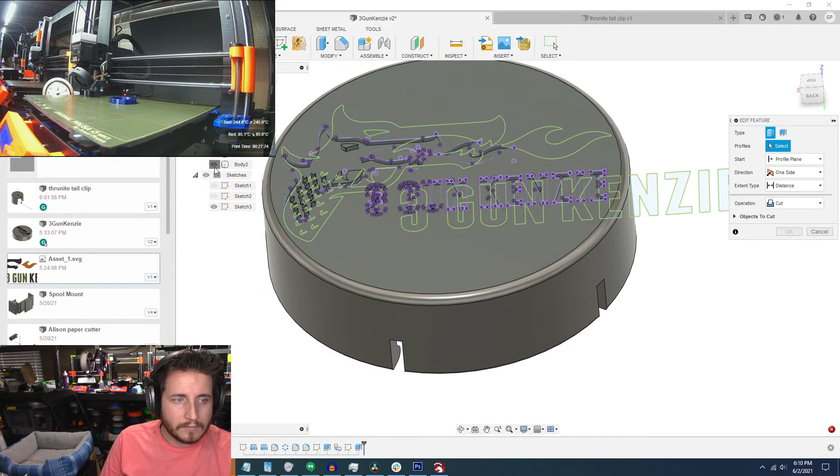Oh, when I copied the body after I did that, okay. Oh, it's gonna get mad. Oh, we're getting mad, ladies and gentlemen. We're getting mad, and it's gonna be like, oh, I don't know what I'm doing.

That's because this is bad. Your second extrude is bad. So let's fix that.

We're gonna do that only on body 2. You're telling me there is no target body to intersect.

Alright, so we're gonna do this my way.

Oh, excuse me. You know what's bad when you have a bad back? Sneezing. It really sucks to sneeze with a bad back. Like, really sucks to sneeze with a bad back.

Why did Sketch 3 pull all that crap?

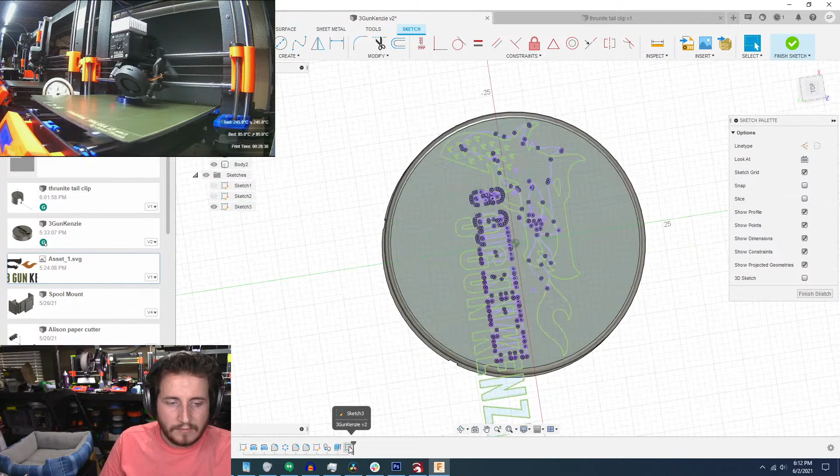Thank you. Alright, I'm gonna redo sketch, I'm gonna redo this sketch too. Alright, we're gonna redo another sketch, we're gonna reinsert the SVG. And since we have body 1 already done, we're just gonna put this only on body 2.

Let's do it. Make it big enough so everything is in the middle, just like that.

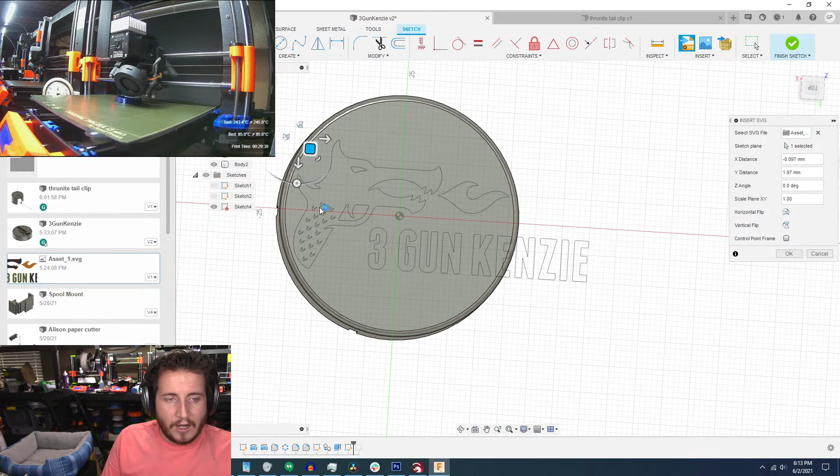I could move the 3-gun in Kenzie, but she's got a lot of time in that logo, and it's not my position to mess with it. People's logos are their brand, and if anyone knows brand and marketing very well, it's Kenzie, so I don't want to mess with that. I know her icon being the fire-breathing 2011 is totally fine if that's the only thing we use - one, because she told me, and two, because it is her icon mark. So in terms of marketing, it should be fine.

I did it again. I did it 0.06 instead of 0.6. I don't know if this is going to be any easier to print, but we're going to find out.

So we've got that one, we've got that one, and now what we can do is hit move. We can move it, and there you go, so there are the two. I don't know if that's any bigger, but let's give it a shot.

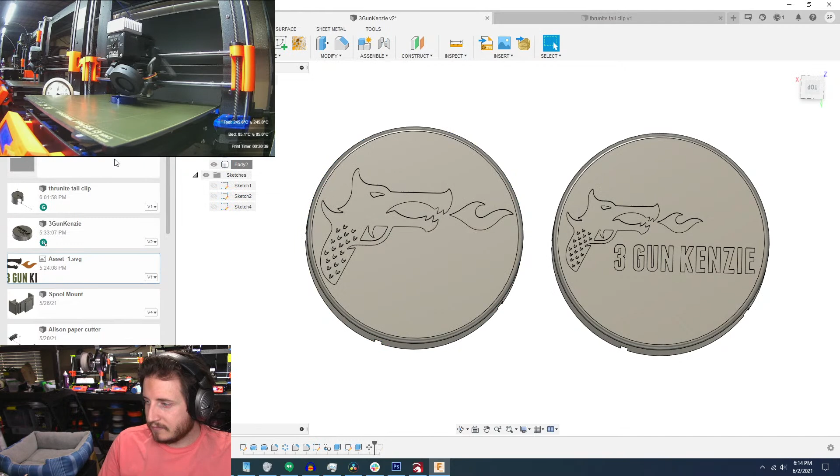Let's save as STL. Now it's going to try to save this body too, and I'm not going to do that. Since we already know, we're going to call it 3-gun Kenzie. I'm going to call it Rev 2, because it's revision 2. So proud of me, yeah.

I've paid a non-trivial amount of money to learn those lessons, and it wasn't... you taught it to me the easiest, but the hardest way was with Thomas, my branding guy.

Oh right, and now because my Windows Explorer crashed, I gotta go back to all my downloads. Nope, those are 3DM logos, we don't need those. We want to go here, all the way to the bottom. I don't want to talk about it.

We're going to use this tool here, which is place on face. And we can see, yep, that should be fine. I'm just going to slice it, see how she looks.

Yeah, scales still aren't coming out, but that might look cooler overall. Once this is done printing, I'll take a look and see how it looks.

It takes a little bit longer because of the filming. So it looks like... is it going to tell me inside of Octoprint? Yeah, it's got 5 minutes left. It's been printing for 31 minutes.

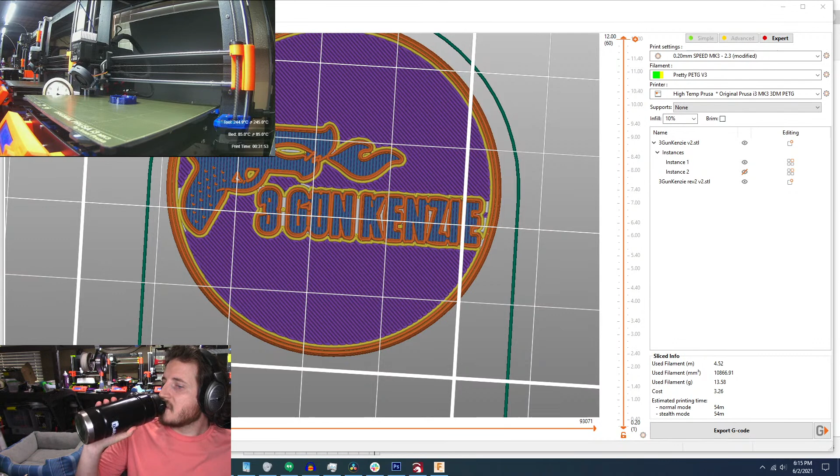Yeah, Octoprint's great, especially if you only have a couple of printers. When you have a bunch of printers like we do, honestly, it's way too much work. Way more work than I want to put into it.

I'm going to put this back to 0.45 because I think it's going to bother me if I don't. But you can run multiple printers off of one Raspberry Pi, you just have to be really careful.

Oh, I know what that is - that's freaking elephant's foot compensation. Yeah, it is, get the heck out of here. That's why it was looking weird. And so you won't notice this.

These layers are 0.2 millimeters thick - they're 2 human hairs thick. But yeah, see, the G in gun doesn't come out right, does it? Well, you'll know what it is, but it doesn't look right.

To handle that, sometimes you would add in what's called XY compensation. Now, back in the day, in some of the other programs, we called it horizontal size compensation. What we're doing is we're blowing it up ever so slightly until we can get the lines that we're looking for. The problem is things like E's can get to a point where they turn into an A or an O.

So we're at 0.05. If we go to 0.1, I bet that's going to be too much, but we'll try it. Yeah, see how it... there's not really a G there.

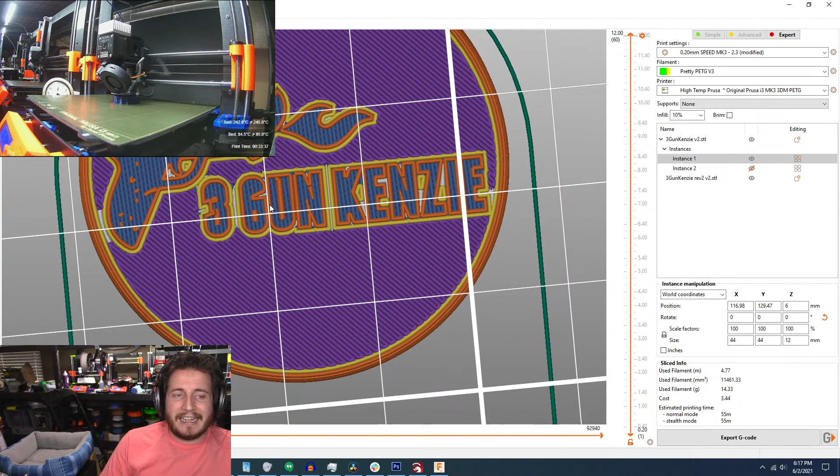And it's a font thing, right? That is actually why 3D Musketeers uses OSIFont. It is not only an open source font, but it is also a font that was designed for laser cutting and 3D printing. It was designed for all of this.

And my phone is ringing. Who's calling me? One of my buddies from Swing Dancing is calling me. I'm on a live stream, Colin! Come on man, I'm on a live stream. Anyway, I'll call him back.

Anyways guys, if you're just joining us, we made some awesome parts for Kenzie of 3 Gun Kenzie, and we made some cool parts for the shop, just some caps for some ThruNite lights.

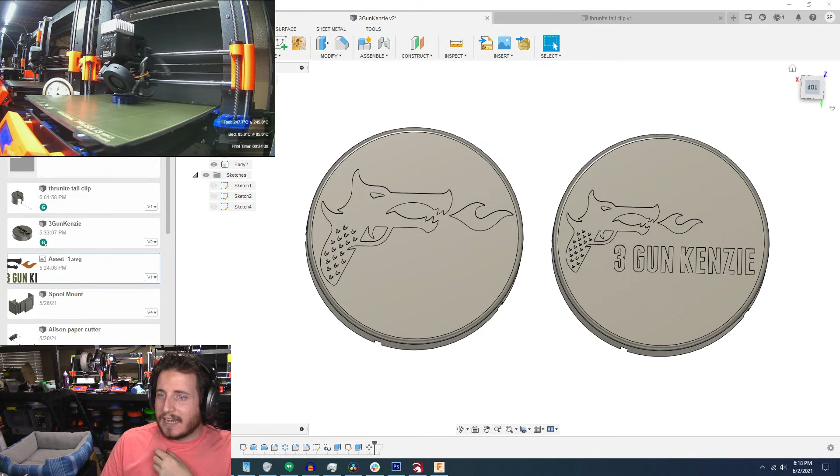Just making sure that there are no comments on my live video. Okay, so he's not like calling me because something's going wrong. Sometimes people call my phone because things are going wrong.

But yeah man, I'm really happy with this. This part, it's getting there. So if we look where it's at, it's basically getting right to where the fillet is.

And this is the cool thing about 3D printing - we can iterate so friggin' fast. Like literally, to do the pair, it's 55 minutes.

Now, mind you, all the pictures add, so every single layer that we have, it adds at least 3 seconds. So we currently have 60 layers, so it's gonna add at least like 3 minutes to it. Things you don't think about. It's weird, weird, weird stuff.

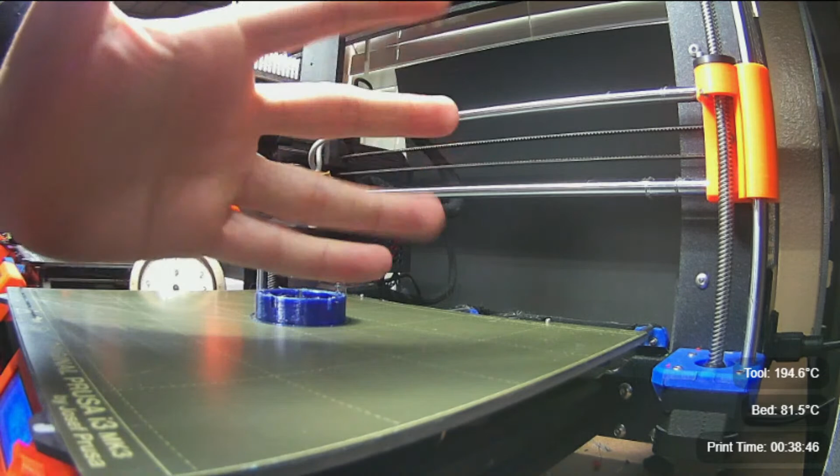So the fun thing about these Flex Steel sheets... oh, it's so hot, I gotta let it cool down. Let me cool it down and I'll pop it off on camera.

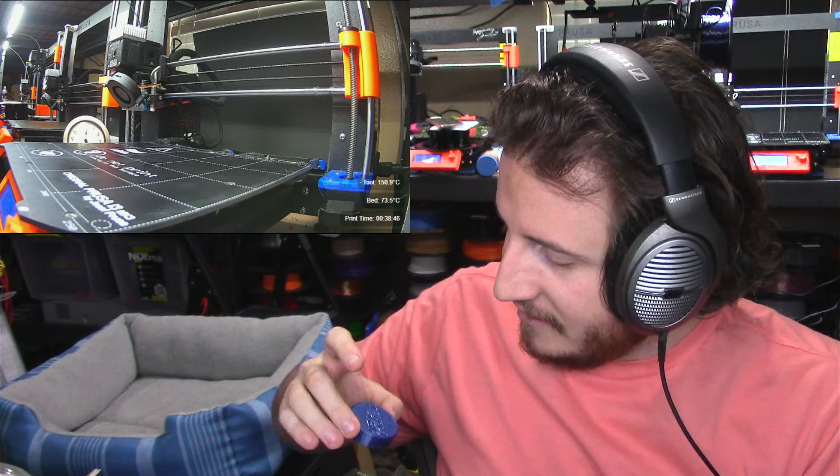Honestly, it came out way better than I expected. When I saw how tiny the part was, I'm like... I gotta clean up just a little bit. We ended up with some stringing as a result of the filming process. That's no big deal, quick little cut.

Quick little hit with the blowtorch. Although, I'm not going to use the big one, I'll use a micro torch. No, I'm going to use the big one, it's going to bother me otherwise. You gotta show perfect prints on camera, right? Here.

I've done this so many times, I'm just used to using a blowtorch incredibly close to my hands.

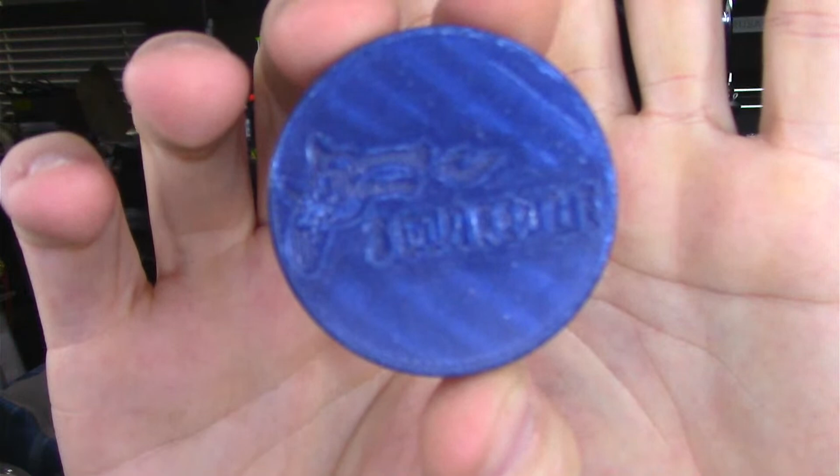So there you go, there's the print. I'm going to turn off the printer. All right, so there's the part. Focus. Look at that part, look at the color. You see, it's like a blue with a metal flake, but even further, it's not great, but you can definitely tell it says 3-gun something.

So cool, I have one too. I'm missing something about I have one too. Kenzie, you said I have one too, I don't know what you're referencing. AE says, unless you're printing in TPU where the print can flex with the plate and laugh at your face at your puny efforts to remove it from the plate.

Oh, blowtorch, ah yes, these things are great. These things are so great, and the tanks are like $4. And the ones that auto light are the best, I don't like the ones where you gotta use a lighter. These are just great, great for starting campfires too, and you can get adapters to fit them onto the campfire style ones.

AE says yes, it is tough. So AE, the really easy way for TPU is to actually use a textured build plate. It's like the only time I ever recommend the stock Prusa textured build plates, because otherwise I hate them and they don't work well to me. Now their satin build sheets, ooh man, those are so nice.